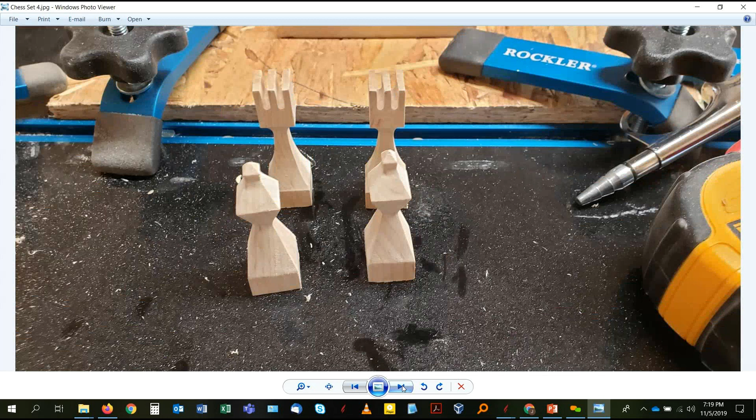And the bubbles are in my way. There we go. So here you can kind of see more of a top view, and this is side one as I was carving them through. Now here is after I've carved the second side, and I set it up on end so you can see through where I finished that off. And then here's the final couple pieces that I've made after they've been completed, and the entire chess set that I made.

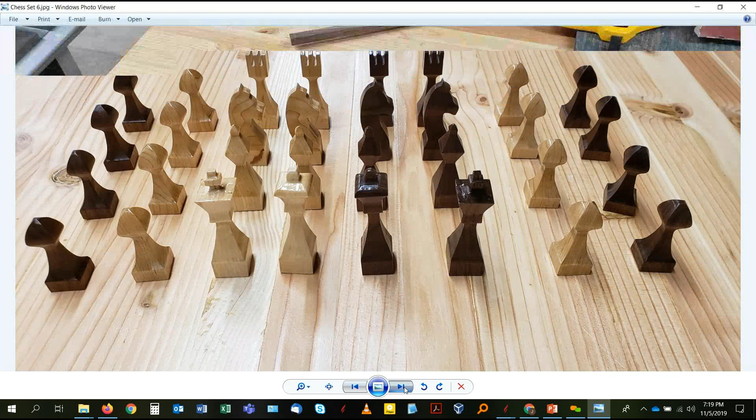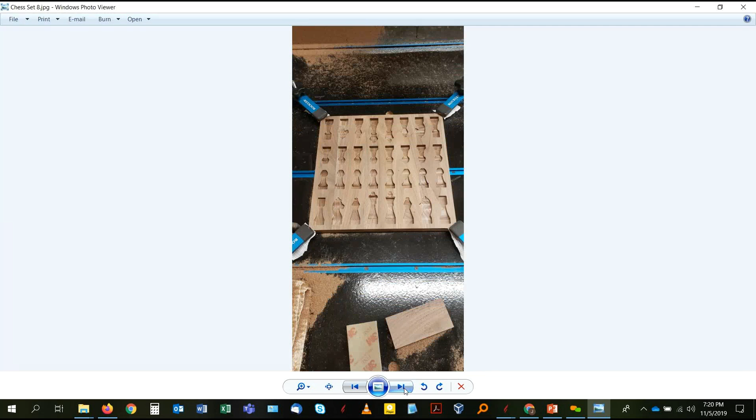The chess set, checkerboard set, they're pretty much standard - there are a dime a dozen out there. Just one model that I put together, putting the maple and the walnut combination together. And then this is going to be the base of it. And then here, where I'm actually carving, I put the pieces in their very specific spot. So I carved out each piece so they fit perfectly inside the board when I'm completed with it.

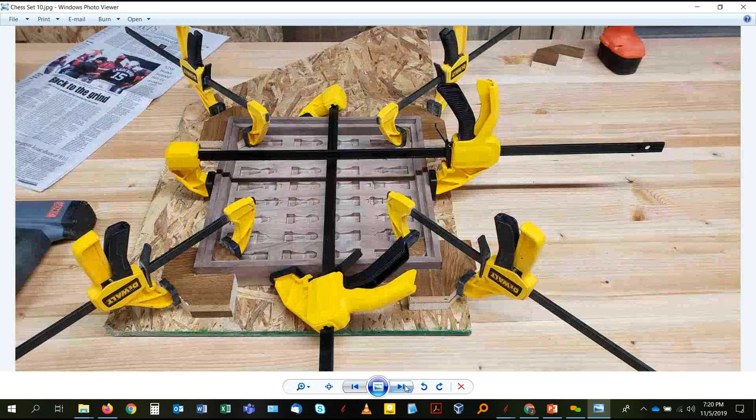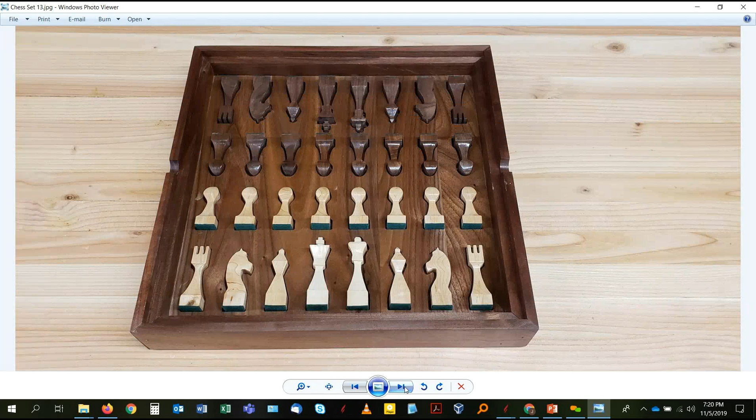Then I'm kind of gluing it up here, and here's the final piece once I've got it all glued together. Here's where all the pieces fit in the box itself, and the chessboard sits right inside it - it just sits on top by gravity. And then you just put the pieces right on top. So basically that's the chess set that I've put together.

So what I'm going to do is give you a PowerPoint presentation of how I put together the rook, and then once I go through that, I'll actually do a demo of it. As far as questions go, if you could wait till I'm done with my PowerPoint presentation, and then once I get into the actual modeling, feel free to chime in and ask me questions as we're doing the actual design itself.

And I gotta flip this around again. Here we go.

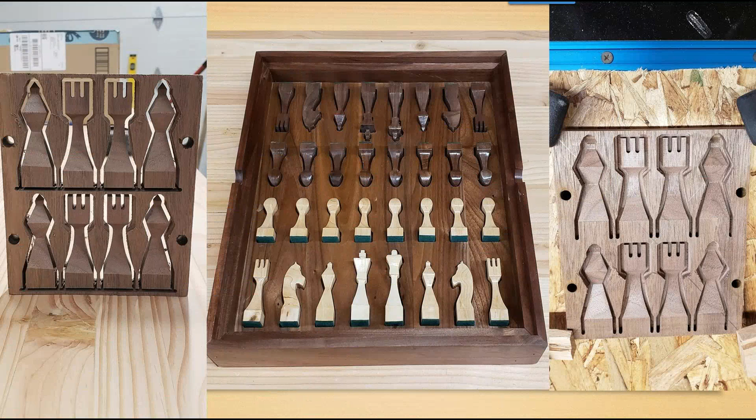So this is again just creating the Rook itself, and I did put a couple of pictures in this PowerPoint presentation I sent to Ted. He's going to post it out there if anybody wants to download it. So some of the tools I'm going to be using within the Aspire software, because you do need Aspire to run this since it's doing the 2-rail sweep, I'm going to get into the drawing tool of the rectangle, the draw line of the polyline, show you a little bit about the offsets, how I align some of my objects, and then the 2-rail sweep. And again, by all means, I am no expert on 3D designing.

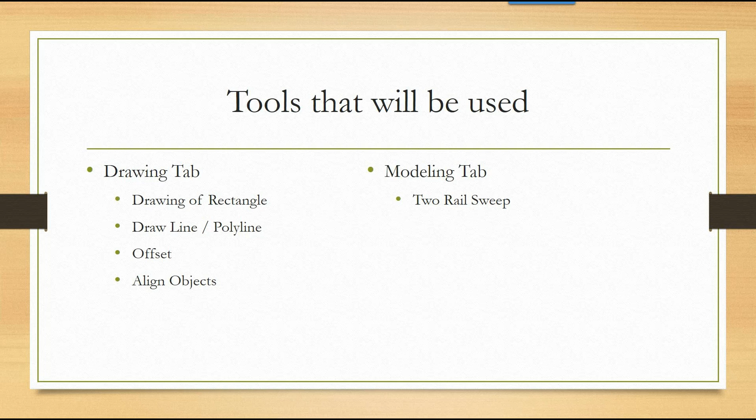So first thing I do is set up the job. It's going to be a double-sided job. The first piece I'm going to do, I'm just going to do one piece. As you saw in the pictures, I did multiple pieces, but on this demo I'm just going to do one. So it's going to have a width of 1 inch with a height of 3, and it's going to be 0.75 - all my pieces are 3/4 of an inch in thickness. Then I'm going to do the material surface, centered position in the center of it, and I just used right to left for switching between the models.

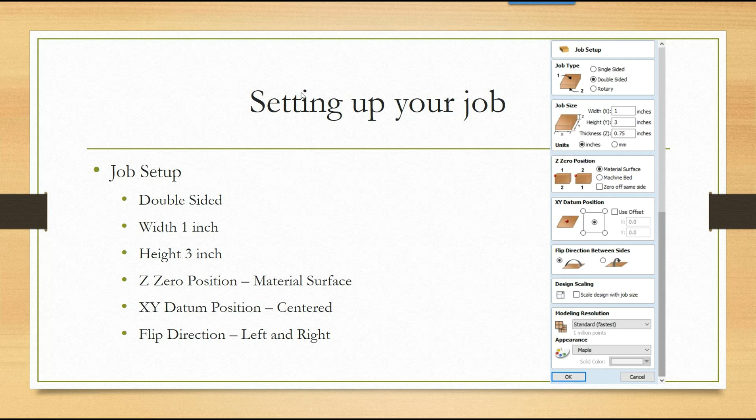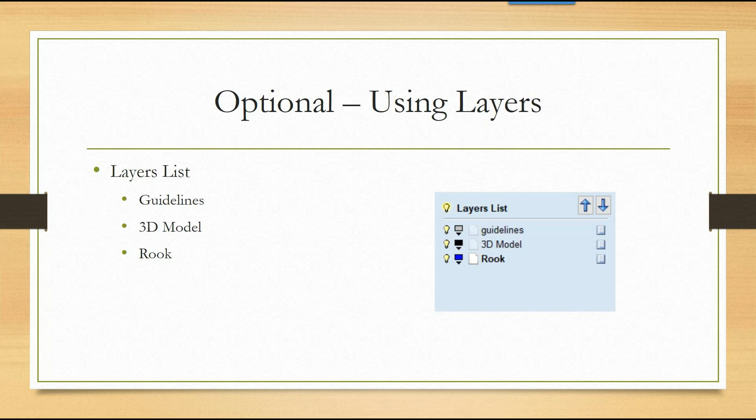So first thing I do is, after I create it, I'm going to create the rectangle, 0.75 in width, and then 2.5 inches for the Rook in height.

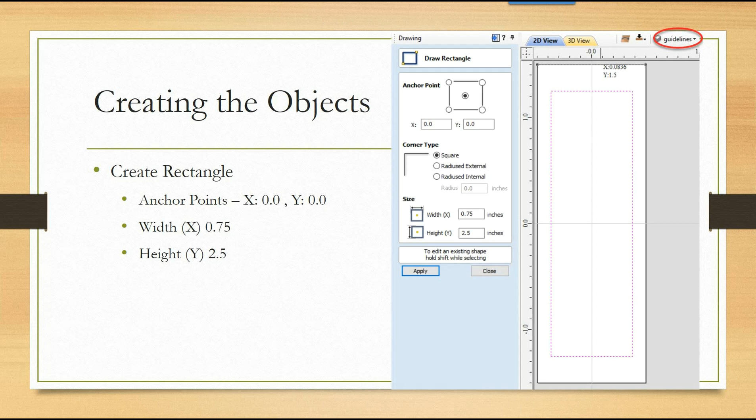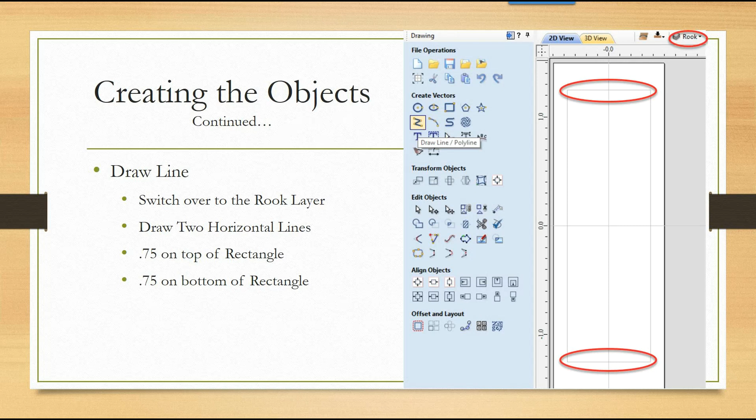And then on the line draw, after I put it out there, what we're going to do for the 2-rail sweep, we need the top and the bottom line, shown with the red circles there, so they'll both be 0.75 in width. Then I just draw the lines over on top of those, on my layer that I have - I just turned it blue so you can see that. I have a habit of making my guidelines a light gray, so it kind of stands in the background a little bit, where my models I typically use red or blue so they stand out a little more.

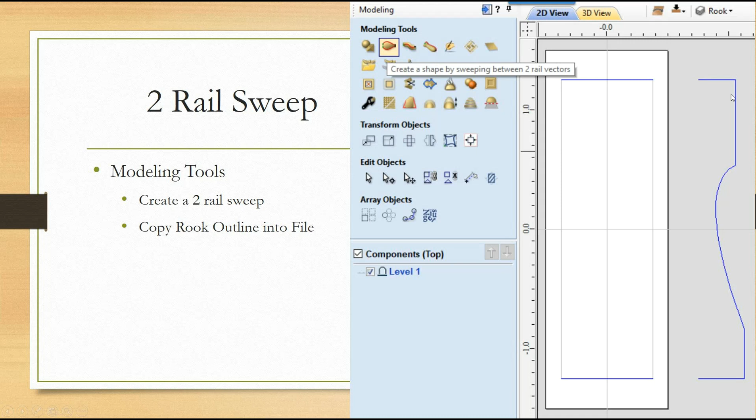So then once you do the 2-rail sweep, you select the top and the bottom, and then click the right-hand side Rook outline, which is going to be the piece that models the 3-dimensional piece from it. Make sure your red line and the green line with the arrows are pointing the same direction. If they're not, you can right-click on it and switch the arrows so they're pointing the same direction.

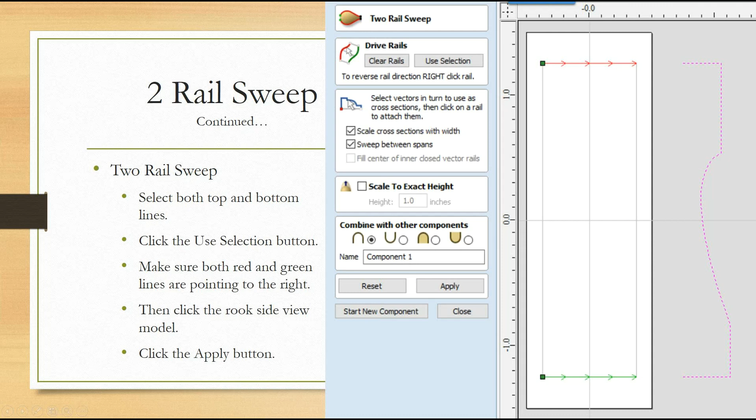Okay, and then just click Apply, and it actually creates it. And then this is a sample of what the Rook outline is going to look like.

So then when I do this - this is what kind of helped me a little bit - once I get the Rook pasted in there, I actually paste an offset to it. The offset will get the tool going a little bit past where you want it to go, but I don't want it to go too far, because as you go right to left, it will go to the far right and then down in, back up, and then over, down in, back up, and I try to prevent that. So I use an offset of 0.03 inch to do that. It's not necessary, but it just speeds up the modeling of the 3D carving itself.

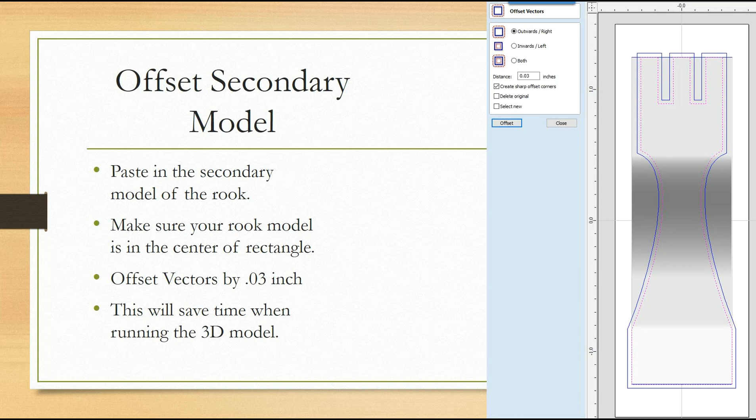On the Rook, I remove those top lines again, because you don't want the bit to go down - you only want it to go right to left. With those pieces there, it actually goes down in there. So again, it's only to help speed up the 3D carving itself. These other pieces will be carved out on a later toolpath.

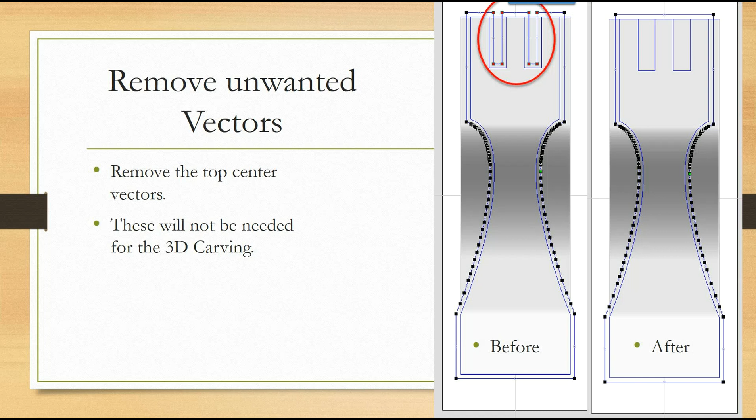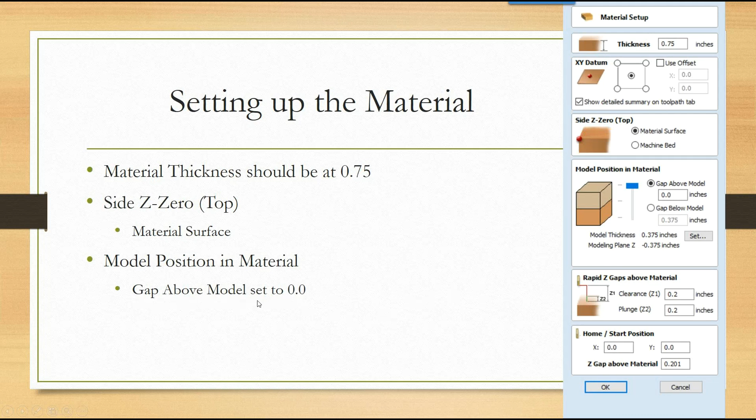So again, material setup for the 3D is 0.75. Side Z-Zero, I make sure that it's at the top, and then make sure there's zero gap above the model.

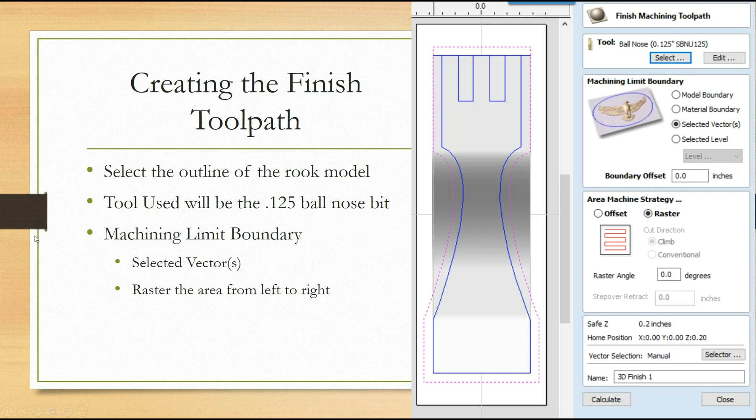Once those are done, I just go into the finishing toolpath. I don't bother with the roughing part - it doesn't cut enough to really worry about it, so I go straight to the finishing, and I use a 0.125 ball nose bit to do the carving back and forth. Then, like I said, I select the outside layers to do that, and it rasters from left to right. It gives it the nicer finishing touch.

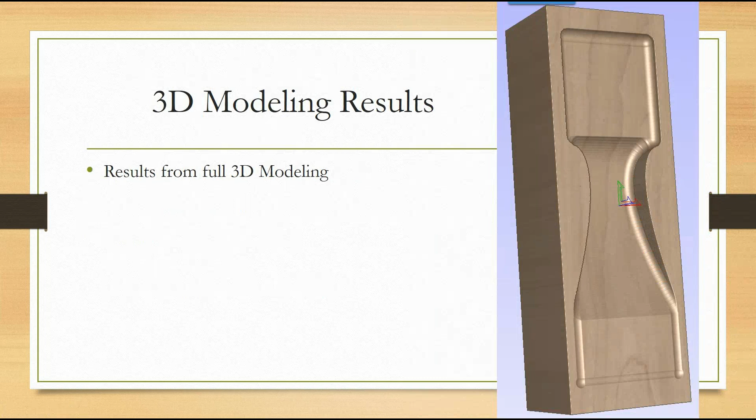Once that's done, it shows you a quick view of the 3D model. Then for the trimming of the piece itself, I take off the two bottom pieces - I forgot to make that note before. So when it actually does the 3D modeling, it doesn't carve out the bottom part here, because it's already 3/4 by 3/4, so you don't want to make any changes on that.

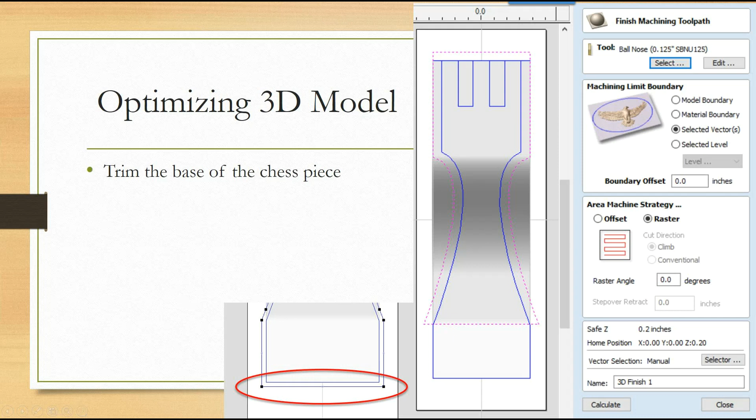So that's the actual one once you optimize it a little bit. I wanted to show you first, if you do the whole thing, what it looks like, but then again, saving on time - it's already 3/4 by 3/4, so I wouldn't waste the time to have that part carved.

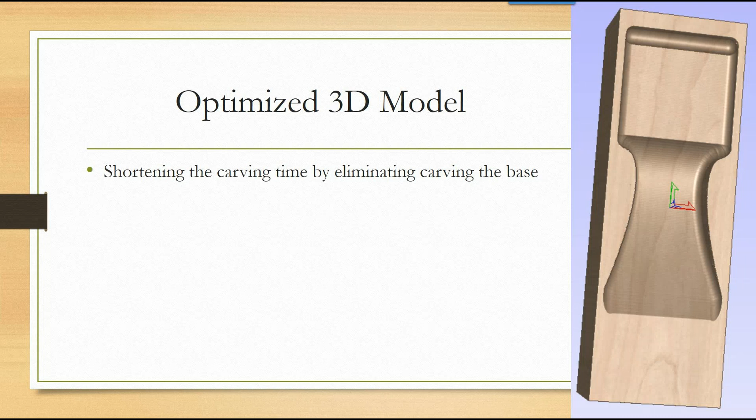Then once we go into profiling it, again, because it's 3/4 thick, when I do the profile, you only want to carve halfway through. So I make sure I carve 0.375 inches in depth - you only want to do halfway down.

And then I've been doing the last pass of 0.02 or 0.01, just to get it a finish or a nicer finish when you're ready to sand it down. So that's what the actual first half looks like before you flip it over and do the second half.

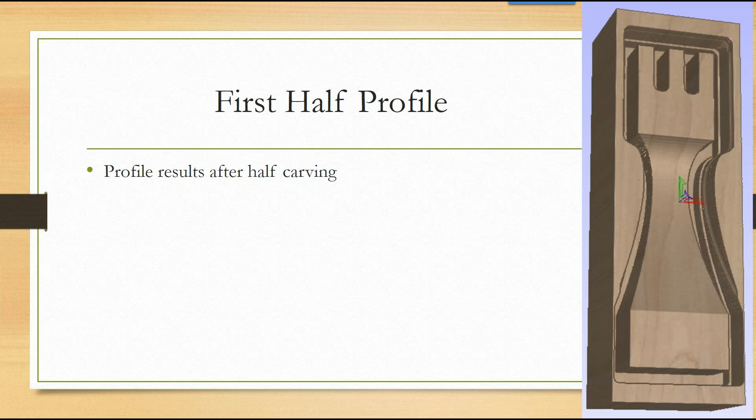When you duplicate the second side, one thing I do is take off the bottom portion, so when you do the profile, it only goes on the outside of the model, and you don't want it to carve the bottom pieces. That way it stays in the block of wood, and then I just use the bandsaw to carve it out. But to make sure it goes all the way through, I carve just a little bit deeper, 0.425, but as a couple of people have already commented, when you're doing two-sided, you've got to make sure everything's lined up perfectly.

Sounded earlier when we were talking, there might be a bug in an earlier version, and by doing the upgrade it fixed the alignment. When I did all this, it was in version 9, and I find that sometimes you might only need two holes to line things up, but dang it, every time I only did 2 holes, it would be off just slightly - that it bothered me.

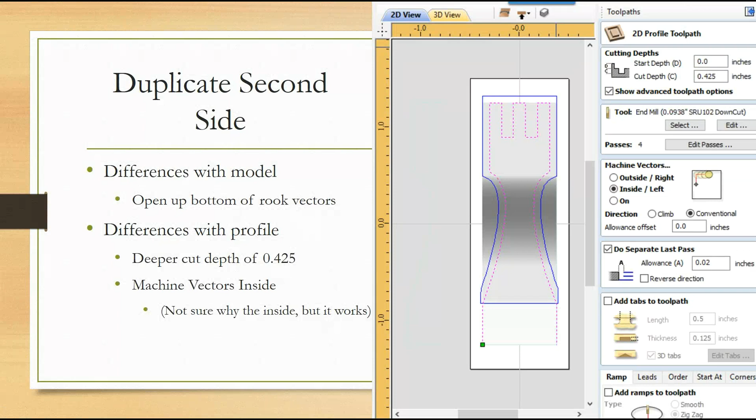So I always make sure I do at least 4 passes, and I try not to do more than 8 pieces at a time, because that fluctuation can vary, and it's just a little more sanding you're going to have to do, or if it's off by too far, you're just going to have to throw them away.

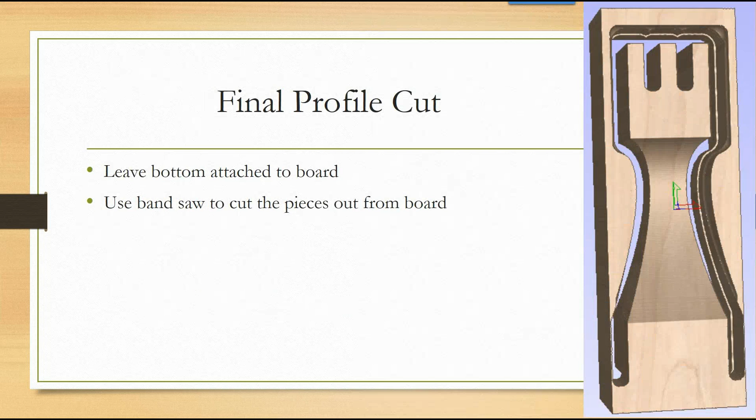So there's kind of what the model looks like when it's done. Again, you don't carve out the bottom flat portion on the last piece, and again I told you I use a bandsaw to do that.

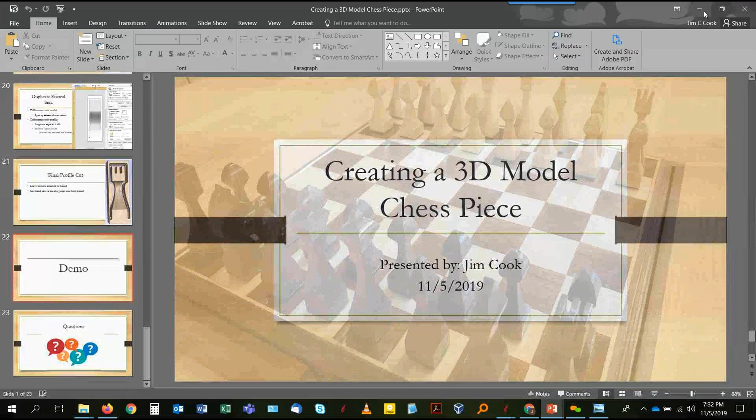All right, the pictures are in my way, and I can't... there we go.

All right, so I'm going to go ahead and create the file. Again, double-sided, 1 inch in width and 3 inches in height, and 0.375 or 0.75 for the thickness.

Sorry about that, I had a customer coming to pick up their stuff and they didn't tell me they were coming. Okay, the zero position for the material surface.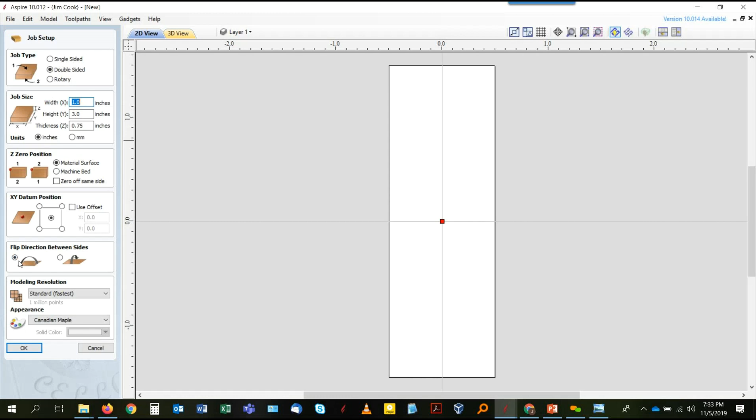And then again, I am doing the center, and then, as I said, flipping it from right to left. And then I'll just go ahead and click OK and start that. So we got that started.

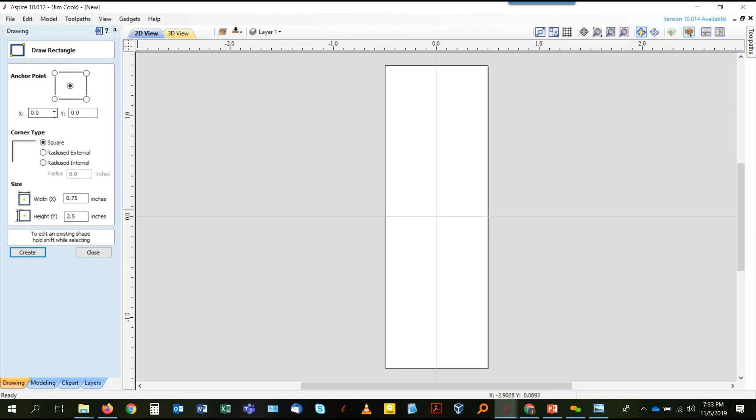So next thing I'm going to do is create a drawing, the rectangle portion. It's going to be 0.75 by 2.5, and I'm going to start it at an anchoring position at x0, y0, and do a create.

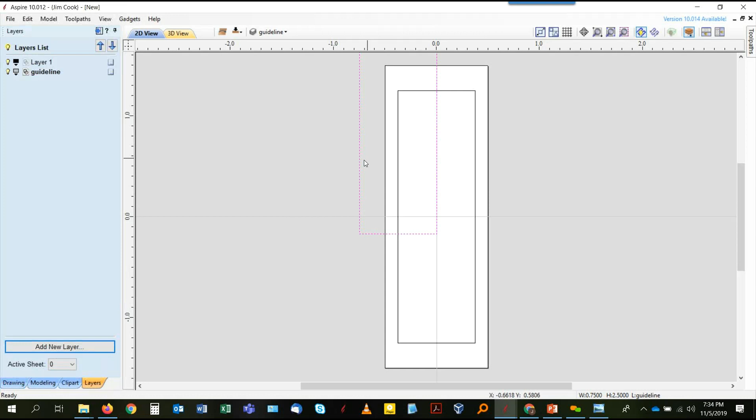And then again, I'm going to get my layers going here, and I'm going to start a guideline. Do a light version of it, and I'm going to... whoops, messed up that one. And I'm just going to move that over to the guideline, and I usually put my guideline up on the top here.

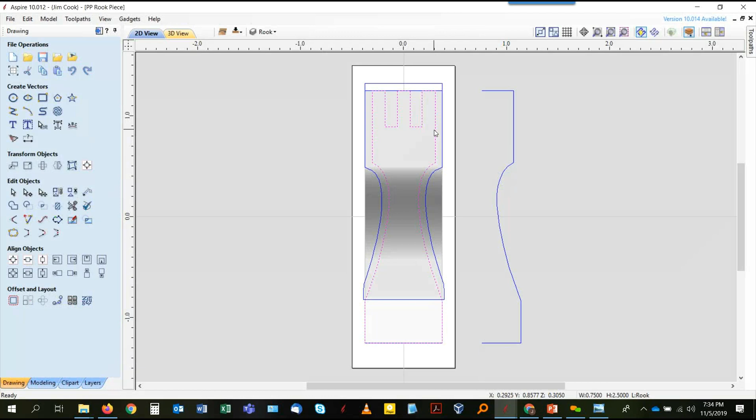And then the 3D model is going to go here. Now I do have the two pieces already drawn out that I'm going to put into the model itself.

I'm just going to copy and paste those on over. Oops. Let's get a paste going here. There we go.

And because I copied it over from the Rook itself, it actually was already in a layer called Rook. That's where that got created. So if you're wondering where that Rook layer got created from, it's from the copy from the other one. It actually copied the layer over itself. So that got moved over. Okay.

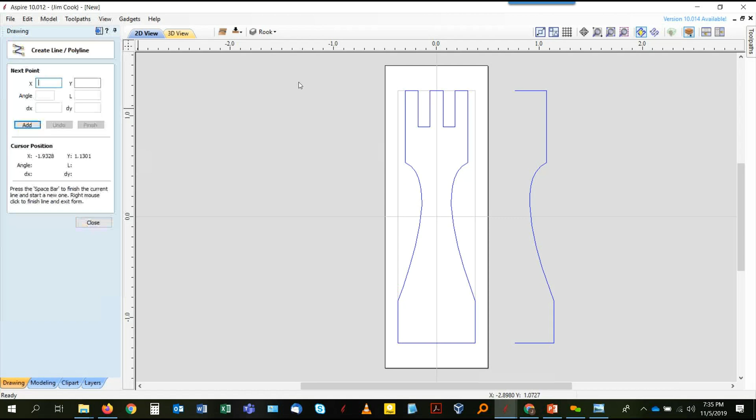Now the next thing I want to do is create the two top lines here. So I'm going to use the line, make sure... yep, I'm on the Rook. Okay, I'm going to do a line here, and I'm just going to hit the space bar to cut that, or to stop that.

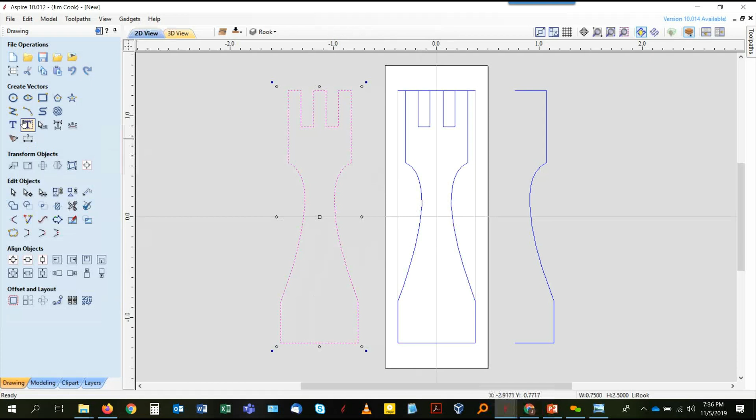You know what, I'm going to move this out for just a moment. All right, helps if I held the control key down. There we go. And I'll draw my bottom line here and hit the space bar again to cut it. So now I have my top and bottom of the two rail sweep.

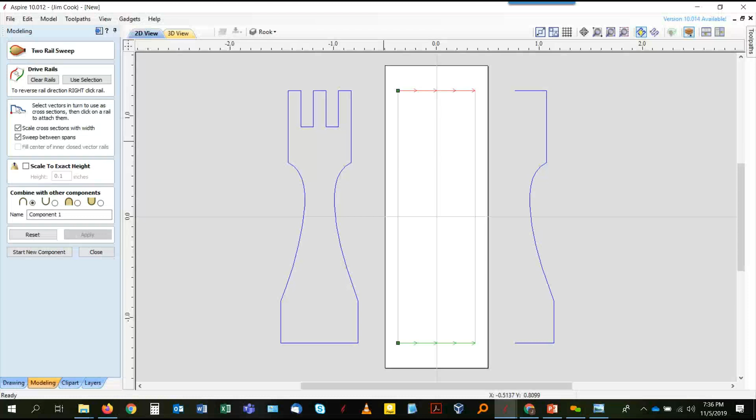And again, on the right-hand side is the actual curve on the outside. So I'm going to go over to the model, click up here at the top of the two rail sweep. And then I'm going to click on the top, hold the shift key, hit the bottom, and I'm going to use selection, and look to verify my arrows are both going the right way.

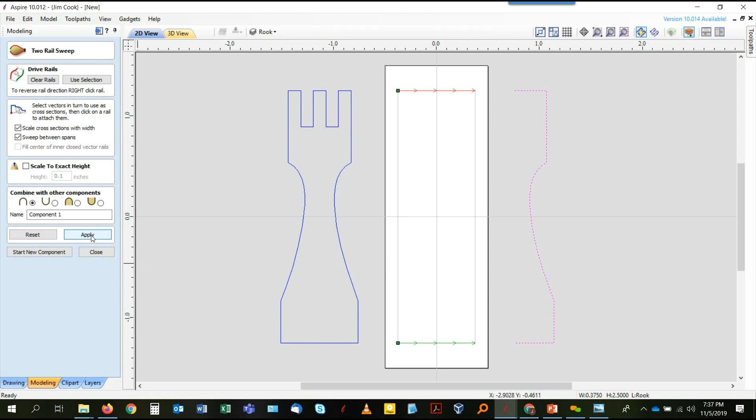Again, if I right click, I can reverse the rail, insert, swap the rail order, but they're exactly what I want, so I'm just going to go ahead and use that. And then I'm going to highlight, again, you'll notice it's just half the Rook itself, and it'll create the model that we're going to duplicate for the other side. Then I'm going to go ahead and hit apply.

And then I'm going to do my 3D view. And there's the Rook that we're going to be using. So that's good to go. So I'm good there.

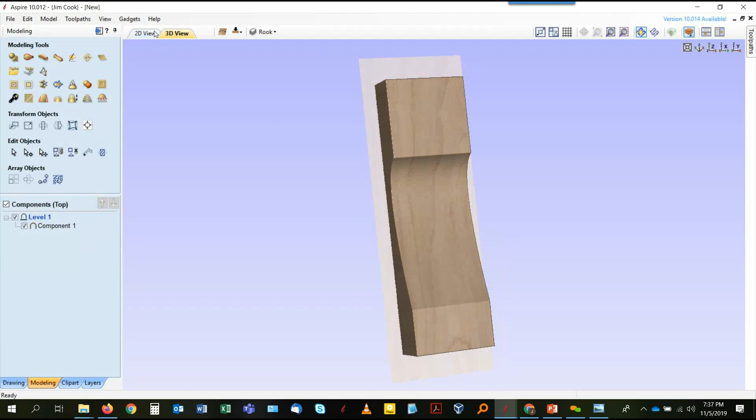Okay, then I'm going to go back over to the model itself here, and I'm going to put my actual Rook back inside by centering that. And then again, the offset is only to help reduce the time it actually takes to carve it.

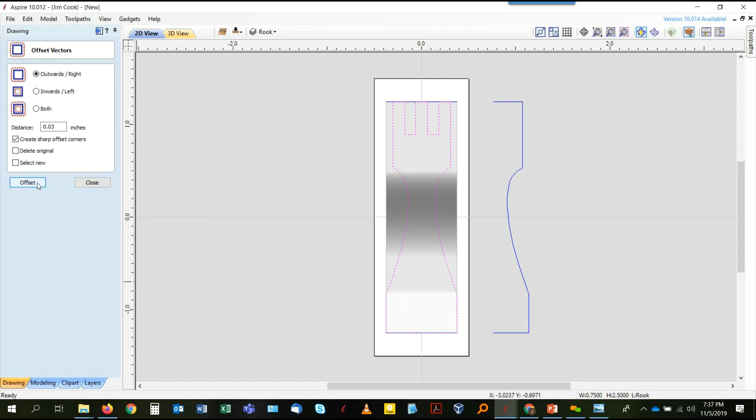So I do a little offset here. It's outwards, and I use 0.03. I do an offset on that, and then it adds that outline on that.

And then again, because I don't want to be carving inside each of these with my ball nose, I'm just going to go into the vector node editing mode. I hit the letter N to go into node mode, and then I'm just drawing a block around those. Highlighted in red, and I'm just going to hit the delete key.

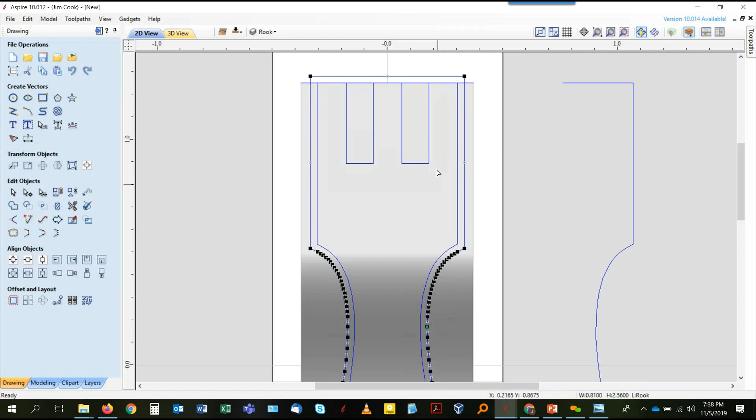Well, that's right, Control Z, sorry. I don't know how many times I've done that - not the delete key, but the D for deleting the node itself. There we go. Then I'll hit the N to go back, to take it out of node editing mode.

Okay, then I'm going to pull over the toolpaths here, just take a quick look at the material setup.

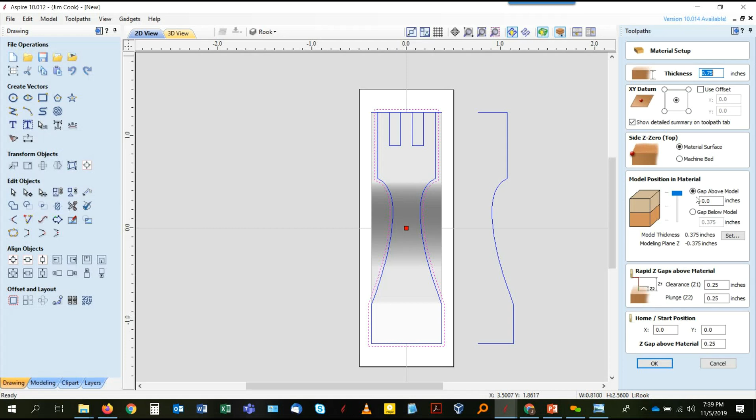And it is 0.75. We've got it centered. The material surface is at the top there. And then we've got no gap on the top above the model, so that's what I want. I think I'm pretty good to go there. I'll just go ahead and click OK on that.

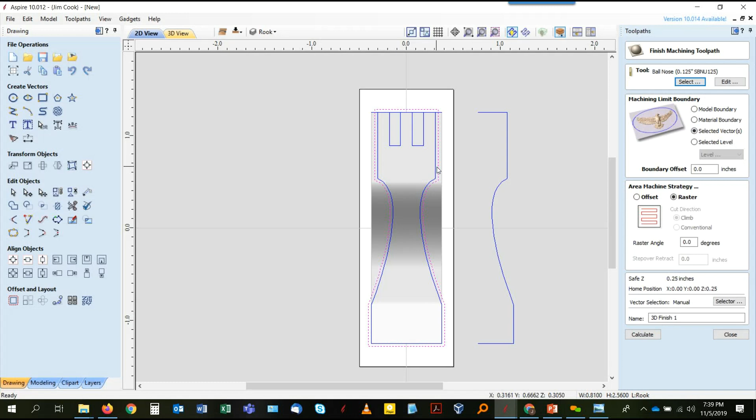I'm going to go straight into the 3D finishing toolpath, and I use the 0.125 ball nose, so that's how I already have that selected. Then I use the selected vectors that we're going to use. You want to highlight the outside one, not the actual rook itself, but the outside. Then you should go ahead and hit calculate.

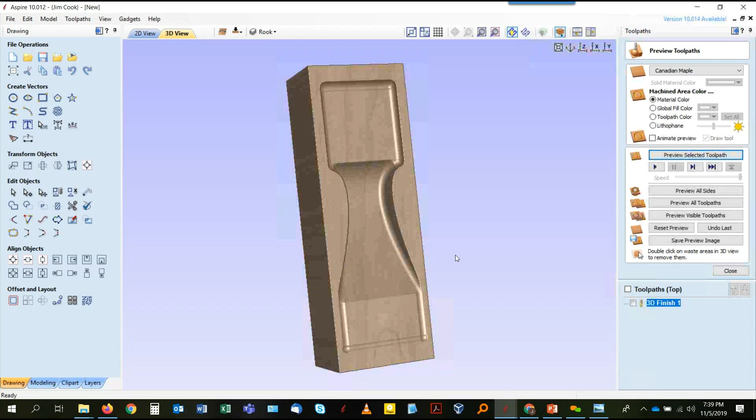We should be good to go. I'll just give that a quick preview, make sure it's working. Yep.

Now, one thing I forgot to do was delete the bottom part, and that's why that kind of looks like that. Again, you can do it, but it's just kind of a waste of machine time. So I'm going to go back, hit the N to go back into node editing mode, and actually delete these bottom two using the D key on your keyboard.

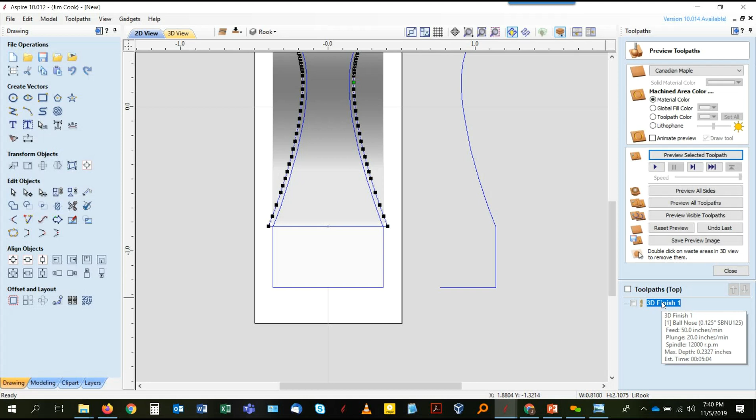I'll go back into the 3D finish model here and calculate that. I'm going to do a reset, preview, and again, that's kind of what I'm looking for, just the top portion only.

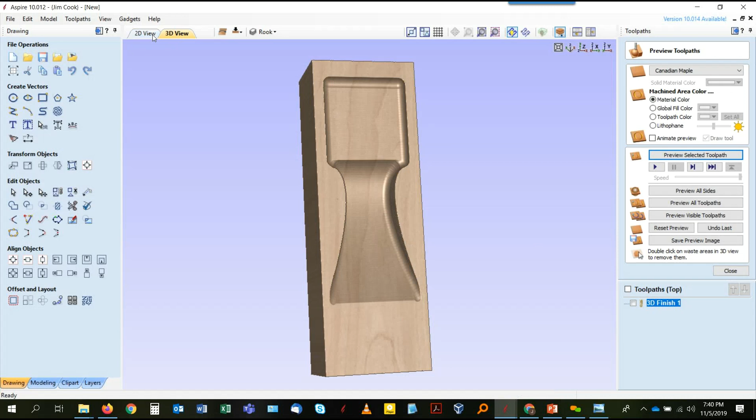Now, the next thing we want to do is go back to the 2D here, and then we want to actually carve the actual model out. So I'm going to use the profiling here.

I've got a 0.0938 bit that I use. It's already selected. And again, the first time I only want to go down 0.375 and use that. The edit passes, I don't probably need to go down that. I'll probably just make 2 passes on that.

And then we want to select the actual rook itself. We want to do the outside, and we want it to go around the whole thing on the first side. Then again, if you want to do, I like doing a little cleanup on the last pass, so either do 0.01 or 0.02. And then I don't use tabs.

Go ahead and calculate that, preview it. And then there's my first half of the rook.

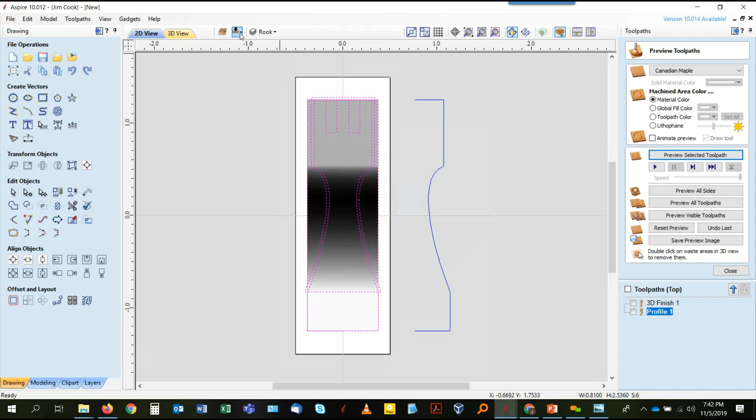All right, now go back to the 2D view model. I'm actually going to draw a rectangle around the whole entire thing. That way I don't have to recreate the 3D model portion. Right-click and copy it, and then I'll go over here and flip the side over.

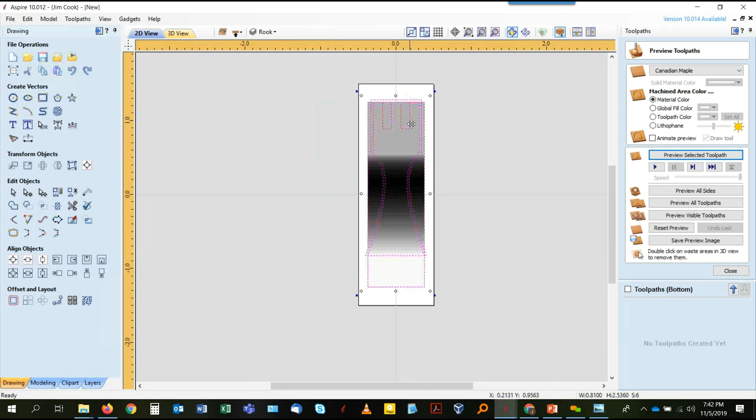For those that haven't done any double-sided work, you can kind of see an outline of where the model is that's on the front side, very, very faintly. And then I'm going to paste that exactly because everything was centered. I don't really have to adjust anymore.

But because it's 2D, two-sided, if you haven't used the side before, you'll notice once you're on the two-sided second side, there is no toolpath created because that was on the first side.

So I flip it over real quick and you see the 3D and the profile. Flip it back over, it is not. So again, we do want to carve the 3D portion.

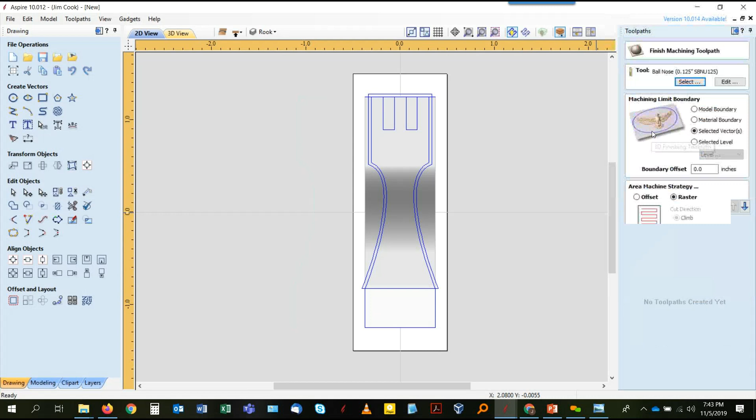So I'm going to do the 3D finishing toolpath. And again, we're just going to be outside of just the top portion of it, not the bottom. Go ahead, calculate it. And then do a quick preview of that. And there's the top part.

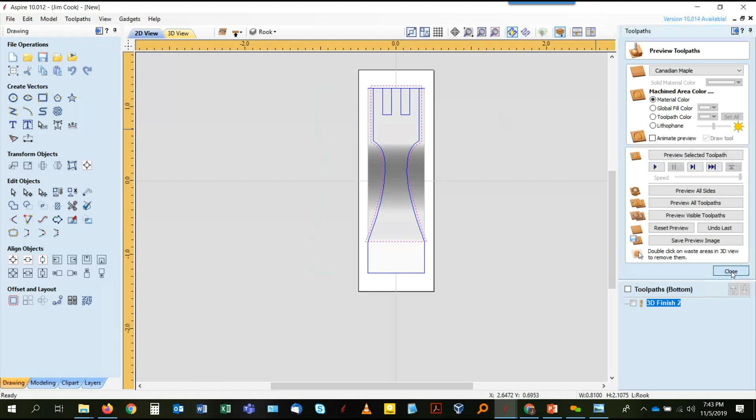Go back over to 2D view. So on this one, we want to click the rook itself, go into node editing mode again, because we don't want to carve this bottom. I want to leave it inside the block. I'm going to hit the D key on this to delete the bottom part again.

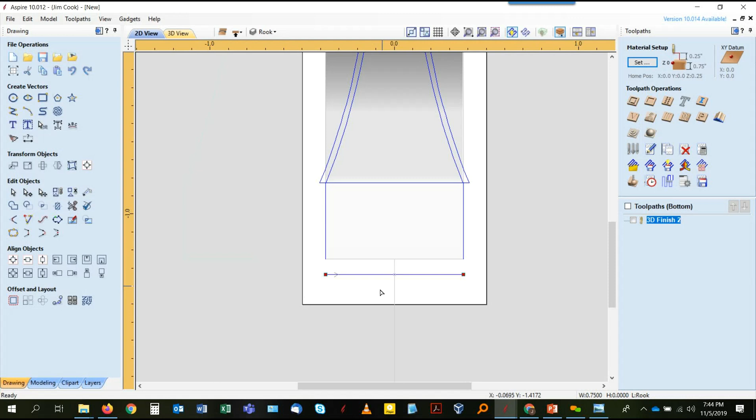This other piece that you're seeing right now is actually from the 2-rail sweep, so I'll just kind of move that down just so you can see that. The rook itself, we're not going to carve through that.

So we're going to do a profile of the toolpath again. Instead of 375, this time we're going to do 0.425.

I've got my bit selected, the 0.0938 bit, which is 3/32nds. Again, it's coming up five passes, but I don't need 5 passes on that, just probably 2.

Do last separate pass, it's optional. Again, whichever you feel comfortable with.

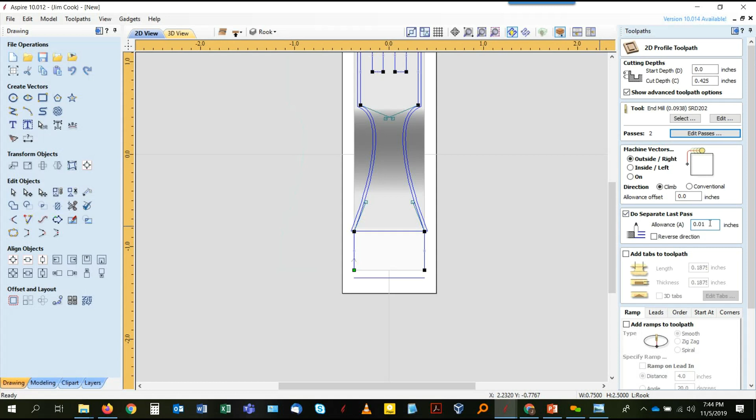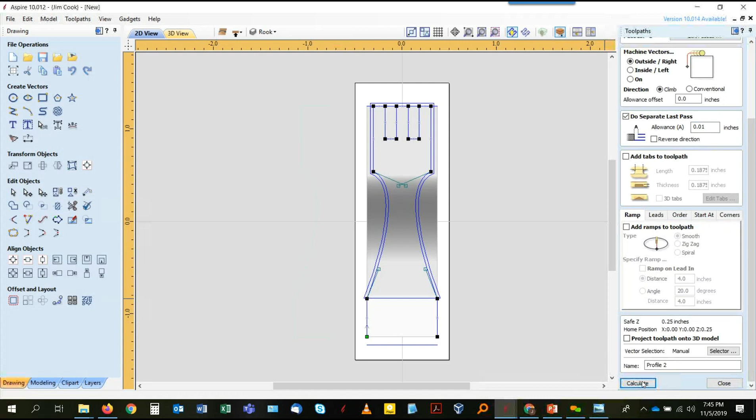Now, the other thing here, I don't know why this is. You'd think I should be carving on the outside of this because 85% of this is on the outside. However, I'm just going to leave that there for a moment and go ahead and click calculate. You'll notice it's all funky looking because for whatever reason you can't do the outside, it's got to be the inside. So I'll just flip that over to the inside, click calculate, and that's what I'm looking for.

So I don't fully understand the inside and the outside sometimes. I just know what works.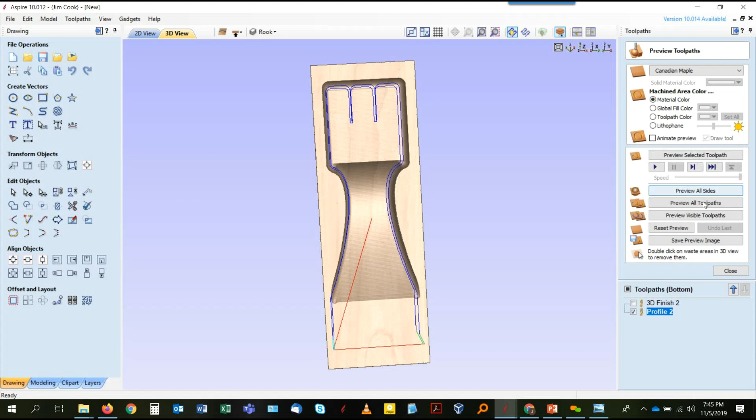So I'll go ahead and preview all the toolpaths left on that. Now you can kind of see right through it because we already carved the first half out, and this is the piece that would stay in the block itself. I'll flip it around here, and you can see that from the first side, that's what gets carved out. So this bottom piece here is what I put on the bandsaw to cut those pieces out, and then I finish it off from there.

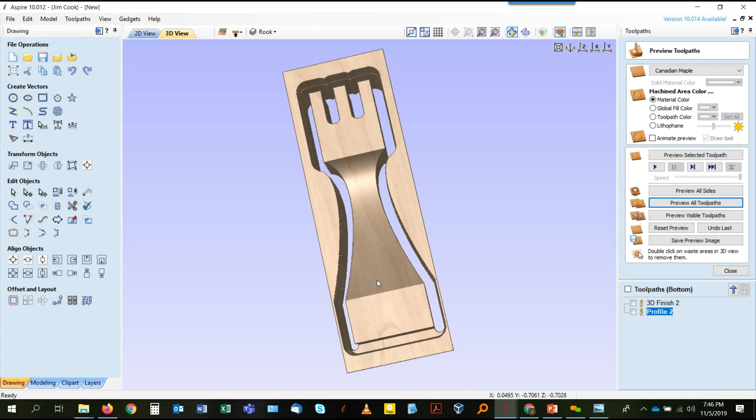Now, one thing I'll point out here, they come out pretty nice. I'm for the most part happy with them. But I don't care what kind of wood you've got, unless you've got some very dense wood, the pieces for maple and walnut still come out on the light side.

So what I've been doing is drilling holes, I think it's a 0.25 quarter-inch hole on it. And I've got myself a little smith that I melt some lead down, and I put some of that on the bottom. Because once I'm done with this, what I end up doing - since you don't want to scratch your board, and I do epoxy fill on most of my boards - I put glue felt on the bottom of it.

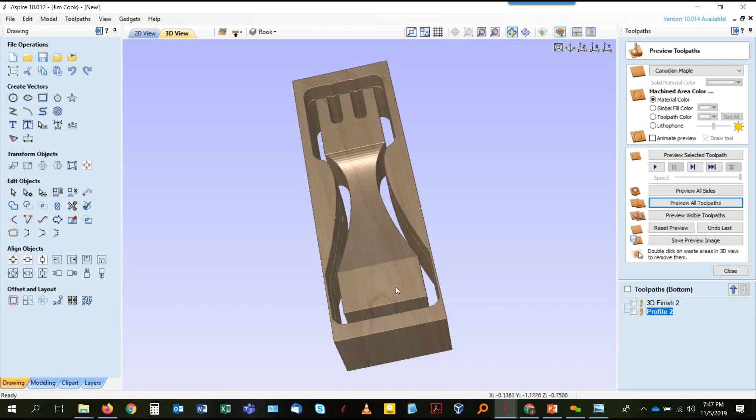So it gives it a little weight to it when you're moving the pieces around. I found out in the first chess set I didn't do that, and the pieces just kept falling over all the time. By putting that lead in there, it gives it more weight, and by having it on the bottom, they at least stand up pretty good.

So there's my rook. One down, 63 more to go.

So there's my presentation, there's my demo, and my next PowerPoint are questions.

No questions? Wait for it. What? Okay, I want to see everybody thinking. I'll start out with a question.

Sure, okay. Now go back into your program to where you were trying to put in your side 2. You were doing your profile of your side 2, and you were going to try to calculate a new program. So you flipped it over to the second side, and you didn't have any...

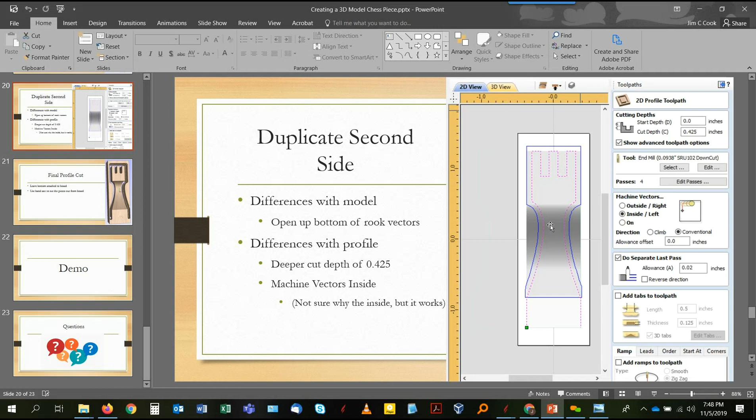calculated toolpaths. Oh, well, let me flip over to the software first. Okay, so you're saying this is when I didn't have any of this. You're in side 1 and you've got toolpaths. Now you're going to flip it over and create a toolpath for the second side.

Yeah, let me delete these real quick. Oops. Okay, there's my fresh side 2. Right, no toolpaths and nothing to work with.

Now, isn't the toolpath that you're going to use here the same as the toolpath on side 1? The only thing is you're cutting just a little bit deeper, but other than that, it's the same toolpath, right? For the 2D it's different because I want to cut a little bit deeper, and I don't want to cut the bottom out. So those are the two differences.

But it's basically the same - in other words, what I'm getting at is, can't you go to side 1 and send that toolpath over to side 2 and not have to recreate it? I don't know, can I do that? I've never done that, I've always recreated them.

How do you do that, Ted? Teach me. Well, I think you can take that toolpath and there's somewhere in there where you can say send to side 2. Yeah, you copy it to side 2. Oh, so you're saying right click. All right, where do I hit copy? You right click out on your drawing.

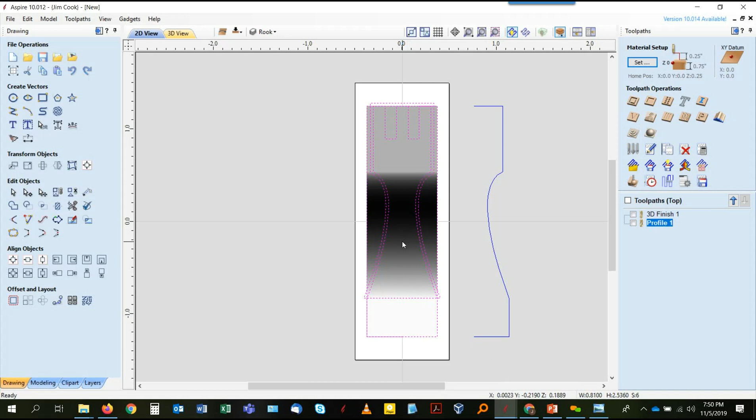That's the piece I thought Ted was talking about. I can copy the tool path itself... I can copy all this. Okay, you're right, you can only copy the drawing, you can't copy the tool path. So if you wanted to send that drawing over to get it on the other side, you can send the drawing over, but you can't send the toolpath over. Okay, that answers my question.

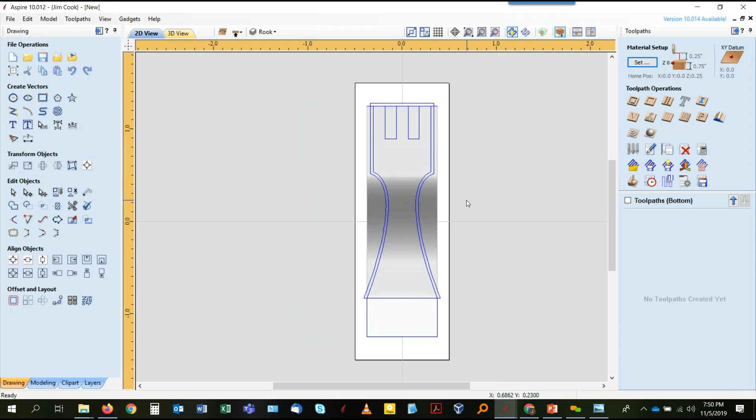So I just right-click and copy this, flip over to the second side. But it seems to me I remember somewhere it said 'send to side 2,' and maybe that was just for the drawing, not copy. I thought it said send. Yeah, that's again the drawing part, not the toolpath itself. If there's a way to do the toolpath, I'm not aware of any.

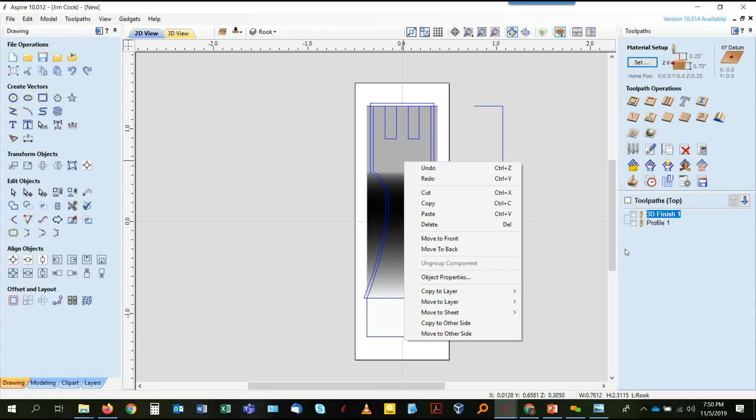So as far as tools, you're using an 1/8 inch bit and a 3/32 inch bit. Yes, for the ball nose I'm using the .125 or the 1/8 inch ball nose bit. And then for the profiling of it, I've got a 3/32 inch bit that I use.

And how's your labeling, what's the SRU102? So the SRU102 is the actual part number. I've got all the part numbers embedded in my head. The reason why I put that in there is what kind of bit is that? It's just an end mill.

So when you say a part number, it's a part number for a brand. Yes. So when I go to reorder it, I just need the SRU102. I do a quick lookup on the website, it pulls it right up, I add it to my cart, and I'm good to go. You order your bits from China or from Tools Today or where? No, U.S. Router Tools, down in Georgia. I'm familiar with them.

Okay, so that's the part number. SRD 220 is a 1/4 inch end mill. SE 1541 is a 60-degree V-bit. I just have them embedded in my head, and that's okay. What helps me on that is not necessarily the part number, but when I'm putting these together, I usually put SBNU and then the part number itself.

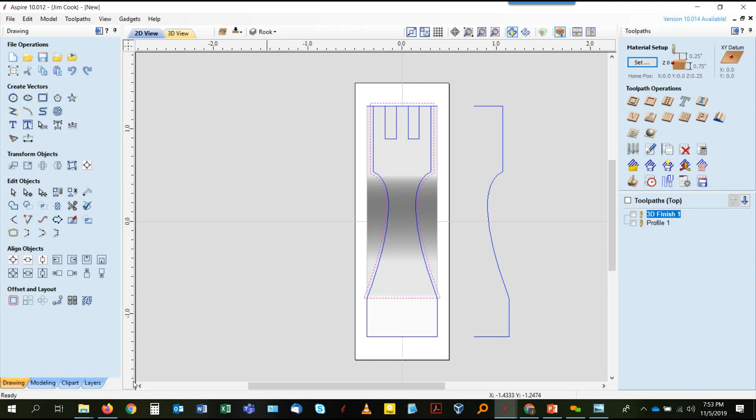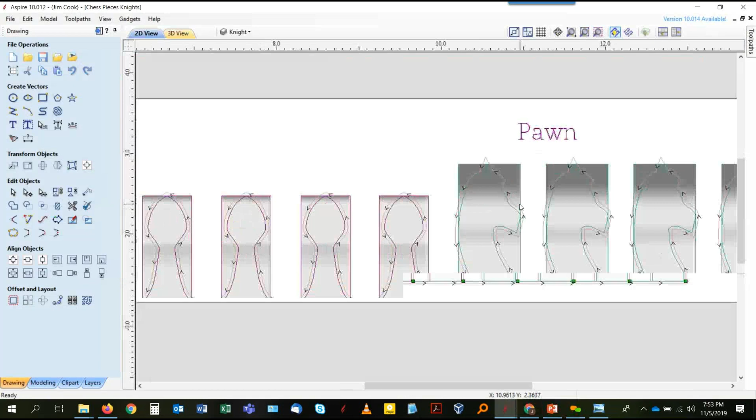No, the knight was. Yeah, you want to show us what the knight looks like? Not necessarily going through the toolpath, but just pull the picture up from your PowerPoint program. The reason why I say the knight is because I'm a symmetrical type of guy, and even though the knight is symmetrical on 2 sides, the other piece is symmetrical on all 4 sides.

So there's the knight. It is symmetrical on side A and side B, but it's not on the right and left. So when I say it was more difficult, it wasn't that much more difficult, but a little bit more brain thought goes into it. Yes, there was a little more brain thought into it.

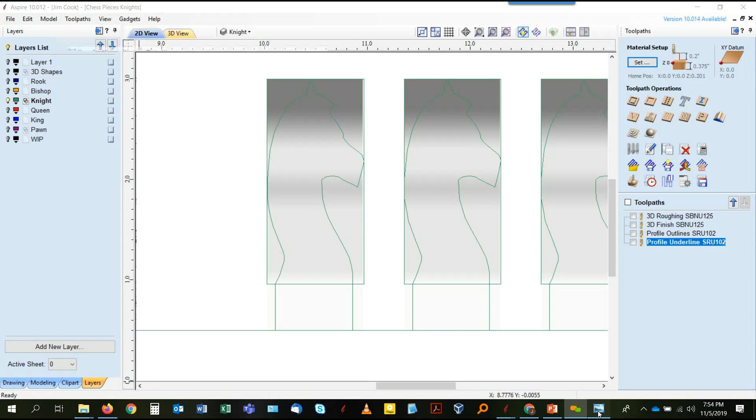Show us a photograph of the knight. There we go. There you go. Very cool, I like the idea how you made holders for them underneath the board. That's a nice touch.

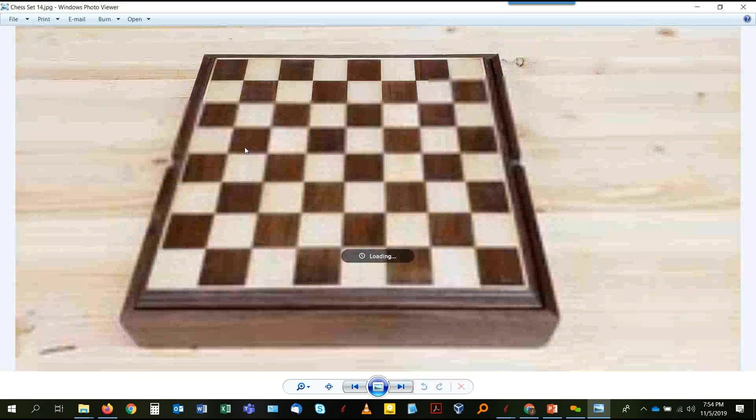To store them. Yes, now is there a cover for your board? The cover is the actual top chest, that is the cover. So there's no locking mechanism on it at all? No, it's just gravity, it sits there on top. I didn't put any locking mechanisms for anything.

And it's pretty much the exact same way for its reverse. As you move the pieces around, your drawing, it's breaking up your audio. Sorry about that, so what I was saying is it was just as easy to make the base itself on the 2-rail sweep. You just got to change the top and the bottom 2 lines instead of making it proud, you want to kind of carve into it. So it really wasn't that difficult at all, once you got the technique down, let me put it that way. It took me a while to get the technique down.

Okay, anybody else have any other questions? It looks like I'm the guy asking all the questions. I have another question for you: do you have an Etsy store, and where do you sell these things?